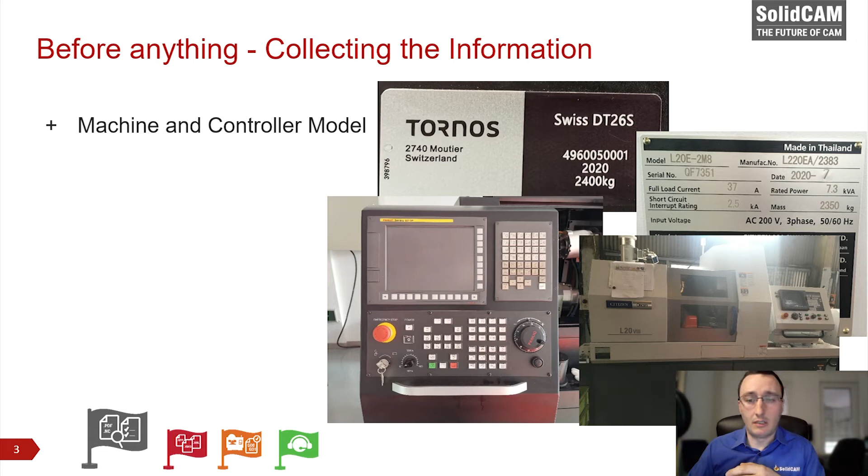At the very beginning, before doing anything, it is strictly important to collect all information related to your machine. The very first is about the machine and control model. I think this is very basic, where most machines look the same. Also in the Swiss type, you have basically the plate on the back side of the machine, sometimes also on the front side, showing you exactly the machine model. The controller model is also very crucial, so make sure these things are noted very well.

The second is the programming manual.

There are various programming manuals, the formats and their qualities. Some machine brands make them better, some make them, let's say not worse, but less quality. Let's say like this.

It doesn't matter if it's a PDF form, or maybe sometimes you need to make scans of the hard copy. It is important that you actually have a manual. Without the manual, you cannot basically understand the machine. The programming manual will help you understand how the machine actually understands the code that's in front of itself.

This was about the programming manual, and the third thing is for sure the G-code examples. It is extremely important that you receive the G-code example from the customer, that it's 100% running on the machine. I will suggest that you always have the most basic example and the most advanced one. I will also advise you to have a drawing together with the G-code example. This will help you understand the G-code and the operations and steps that the customer is taking in order to machine this part.

It will help you analyze the way the customer programs this part, but also from the other hand, it will help you understand what are the order of the M codes and G codes in order to run this machine well, especially in some specific cases of machining.

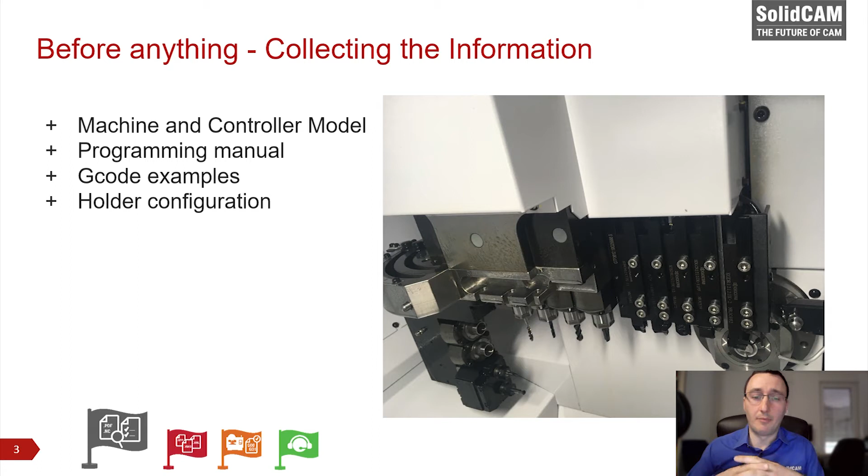If they do, make sure that you also grab these configurations as well. Over here, I just have an example of the Citizen L20, looking on the front tool, back tool post, long drill. And also it's very important to check.

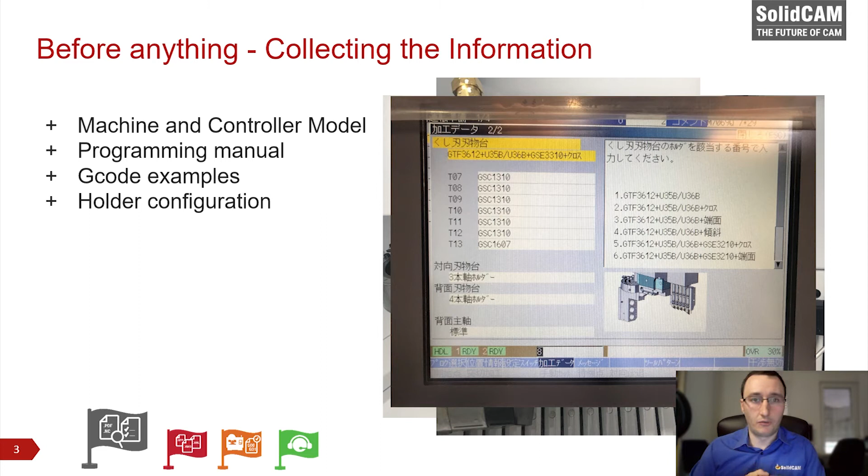On the controller, you have the machining data. Each machine brand is different, but basically the machine needs to understand what is the holder configuration that you're running now. In this page, you can see all these numbers. You don't need to actually understand them, but for sure when you go to the programming manual later on, it will be clear to you what is the holder configuration that your customer is currently running on this machine.

The fifth thing is the 3D models of the machine for customers who want to have the machine simulation. I would strictly recommend having this for all Swiss type machines. Some machine brands have them ready, some machine brands don't have them.

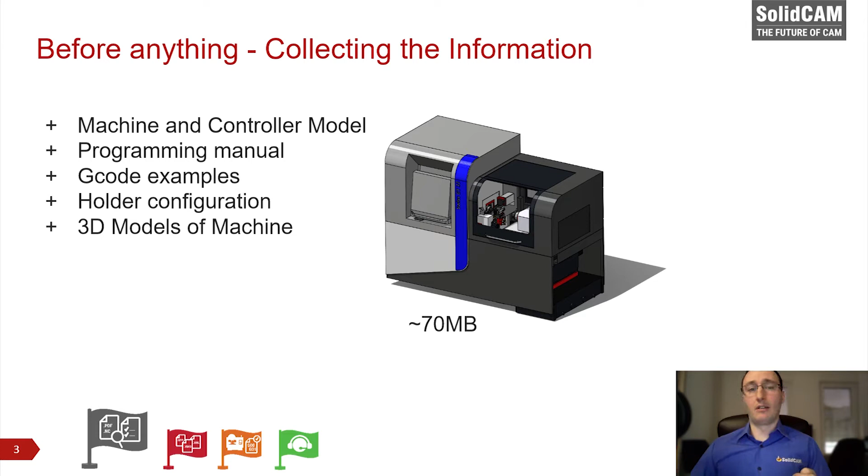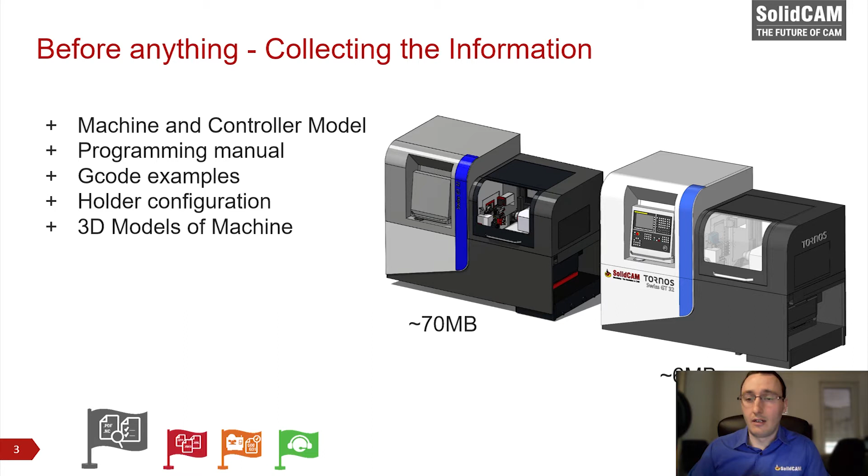From my experience, I figured out that these are pretty hard to get. And even if you get them, they're not well optimized. The export size is very big, which will definitely influence your simulation experience. There is some work in optimizing the 3D data later, so you get something that's much less in size, so you get the best programming, simulation, and verification experience.

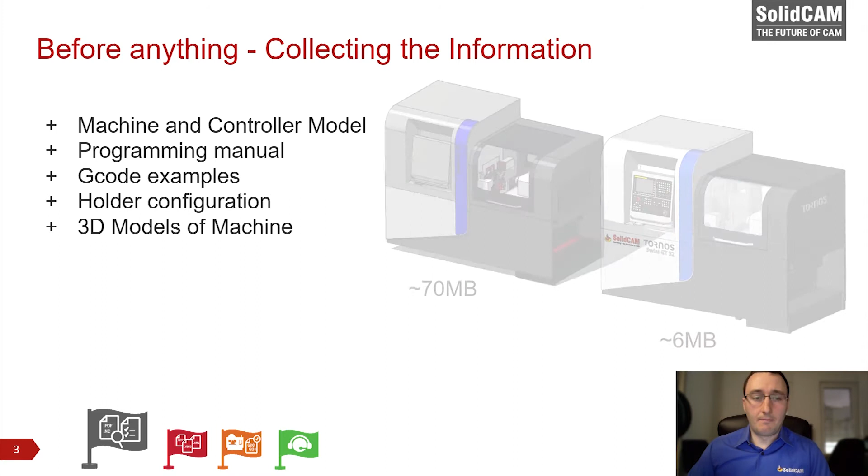Now, in the case when there are no 3D models, there are two cases. There are really no 3D models existing, maybe the machine is old. But there are also examples when in order to get the 3D model, it takes like 3-4 months to get it. Right now, you need to finish your project and you don't have the 3D data. So how can you do it?

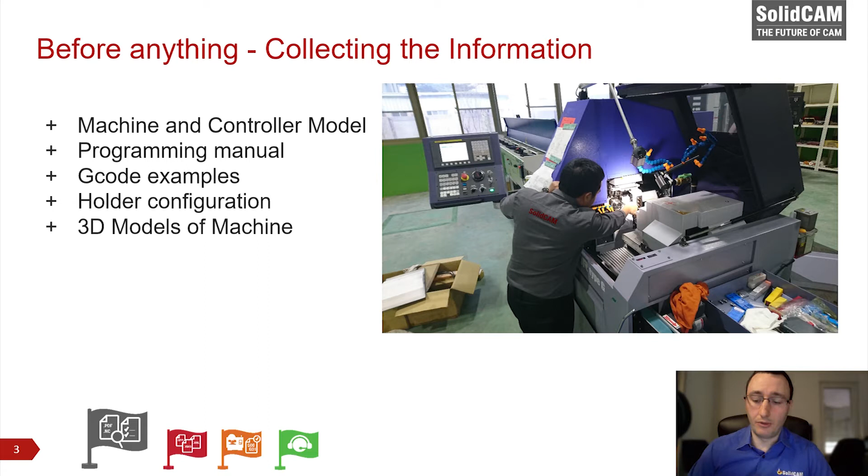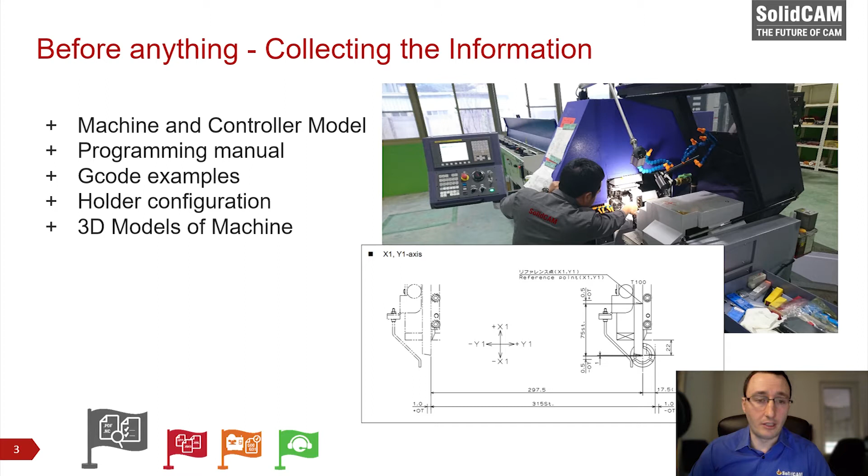Luckily, the programming manuals are good. There's a lot of drawings inside, and they are very accurate. From my experience, I get a very positive experience with this. So most of the 3D model of the machine, the main components, the movement parts of the machine, can be designed based on the drawings from the programming manual. There are some elements that may not be possible to do, but definitely you can do it on site. You can take some measurements if necessary for the verification and simulation.

This is the results of, for example, one of the machines that we have designed, which is fully optimized, very small in size, very fast simulation. So I definitely encourage everybody who doesn't have access to any 3D model data available, that yes, you can still do it up to this level. Of course, it's not necessary to do it up to this level, but at least to tell you that yes, this is actually possible.

All right, now the second stage. Once you have all of this information, let me also go back for a moment.

It is also extremely important, after getting all the information, that you validate your data. It happened many times to me that programming manuals were wrong, G-code examples were wrong maybe. This can be easily validated if you take a look at the G-code examples and compare it with the programming manual. So make sure you read everything before you actually start writing the post.

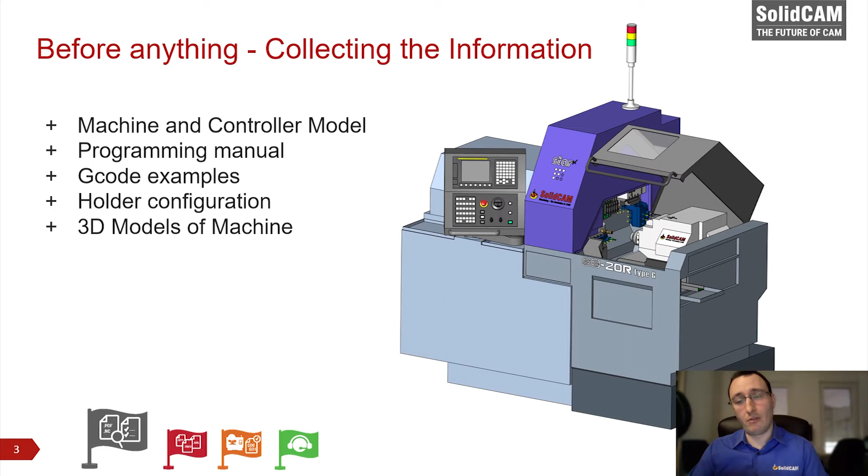So we make sure that we read all the things necessary. We check out the G-code examples, and then we go to the stage where we are actually writing the post processor. All right, now writing the post processor.

First, the very first stage is building the kinematic. SolidCAM understands the kinematic through the VMID file, which basically consists of the axes, linear and rotary, the turrets, the tables, submachines, and a lot of information relating to the controller itself and the working style for this machine. All this data is stored in the VMID file. I think this is the very first step.

Now the second step is writing the SolidCAM to NC translator in the internal language of SolidCAM, which is called GPPL, and the extension for this file is GPP. I would say this is the most intense step of writing any post processor, not only for the Swiss type for sure.

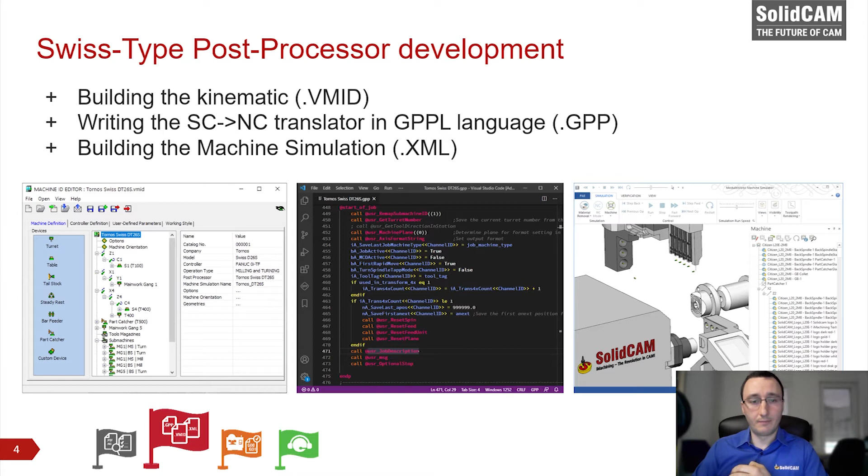Okay, there are many things that are not in the documentation, therefore it's very important to test it on site. Now, before going on site, there are also some things that you need to do. First of all, make a programming of your particular CAM part, make the visual check of your machine simulation, and do a visual proof out of your G-code. These things are very important.

You need to make sure you program at least two CAM parts. The first CAM part is the part that you think is most convenient for this kinematic, for this controller, for this customer. There are tons of rules that we have internally about what this CAM part should have, what kind of geometries. But basically there is only one rule: make the shortest toolpath that will actually give you the best output results.

Okay, so to validate the post-processor output, visually check it in machine simulation, and then also prove out your G-code visually through some multi-channel application where you will see if all the codes are okay, if all the G-codes are in the right spot, and also compare it with the customer one, and so on.

Now, there is one thing about what I said about the CAM part. The first part is definitely the one you choose, and the second—also very important—is the customer part. Usually customers always give this task, like 'please provide me a G-code for this part.' Usually this part is not the very first step that you need to do. The first step is always to test your part, validate your part, and of course it is important—no excuses—that you will also do the customer part.

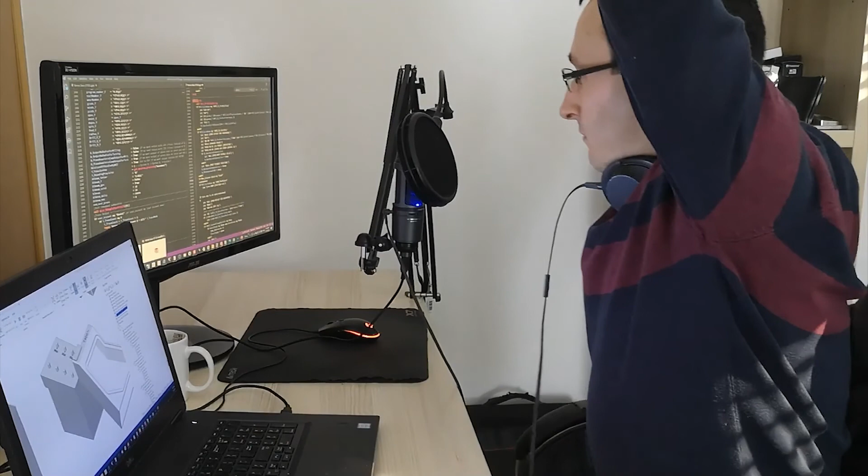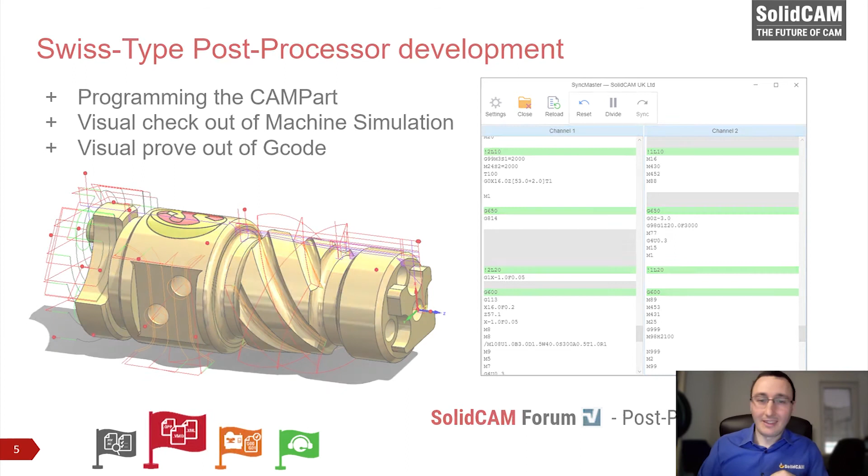Once the post-processor is ready, we go to the customer to validate the output on the machine. But the very first step is to schedule it on time. You need to understand customers usually run this machine 24/7, so it's very important to schedule beforehand and communicate with your operator about specific things on the machine: available stock size, available stock material, holder configuration, and tool availability. These are extremely important to have ready before you go to the customer.

Make sure these are ready because they can save you tons of time on setup. Swiss-type machines are not so easy to set up. Keep in mind these machines run 24/7, so try not to use stock sizes or tools that aren't available on the customer side. Customers like when you use the setup closest to what they have, because after post-processor validation, they can continue running their parts.

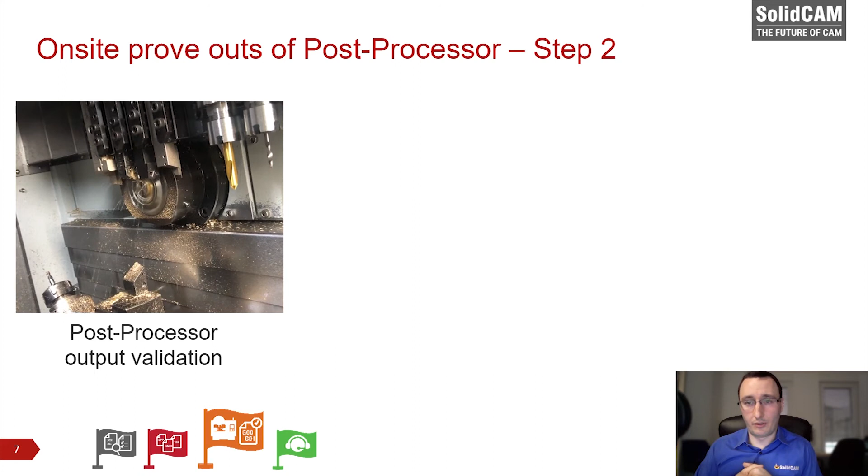Now we are at the customer, validating our post-processor on the machine. We come right on site, deliver the G-code, everything is ready, and we make the post-processor validation. There are tons of things you need to check: arcs, planes, compensations, plane rotations, part transfer, axis patterns, superimposition, and more.

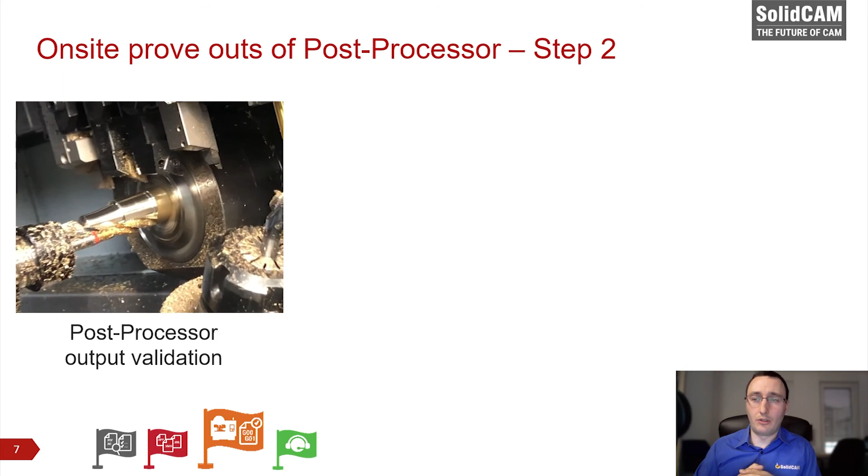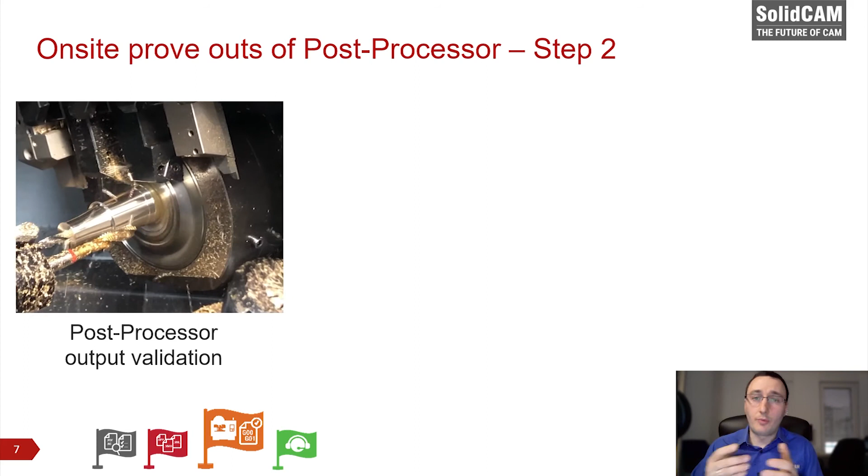Once on site, from my experience, it never happens that the very first code runs from beginning to end. That's why it's extremely important that you're on the customer side, there at least for one day, maybe two, depending on the first test. After the first test, it could be that we're too far away, so please continue working with your posts, or it could be that we can adjust it on site.

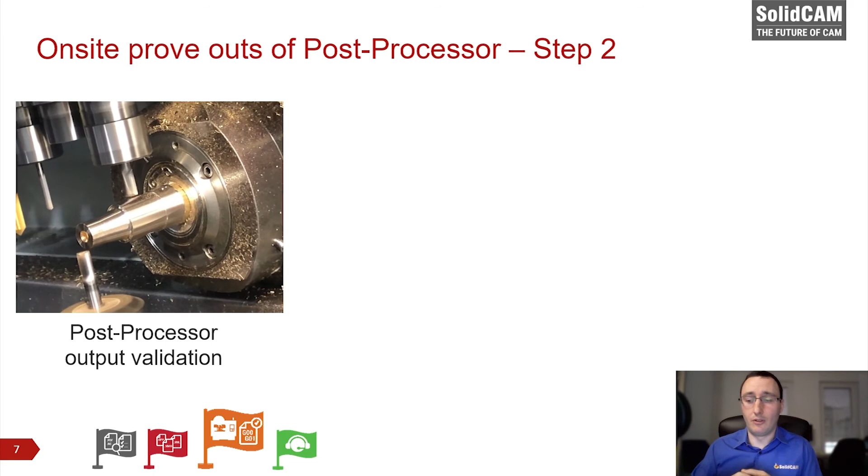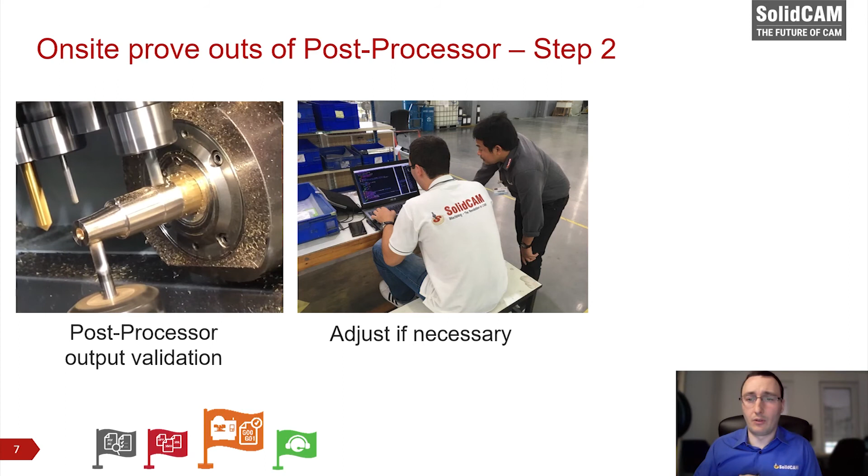Make sure you have experts next to you, either online or on site, so you can adjust the post. It's best if you can adjust it on site - it's very important because it gives confidence to the customer, that these guys can change the post on site, so if I call them, they can always modify according to my needs. This is extremely important.

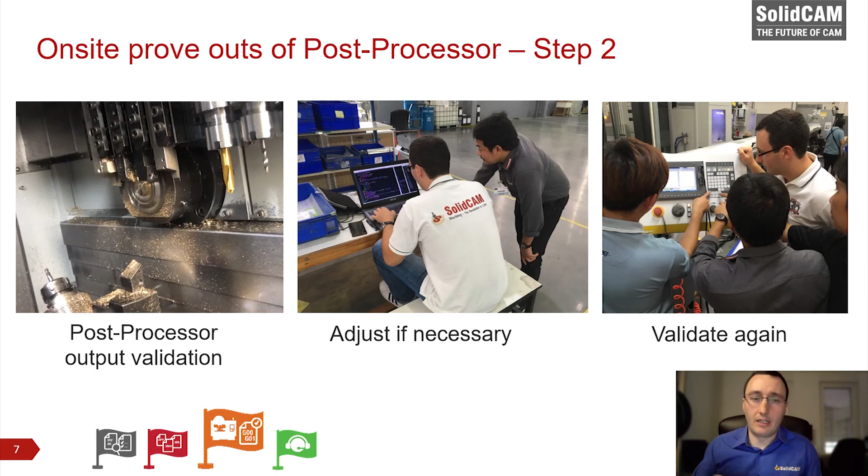And third, after adjusting, validate it again, and make sure the G-code runs from beginning to end without any manual modifications. The result, of course, is that you have at least two parts: one tested by yourself and one by the customer. What's important to say in this case, keep in mind that...

...these parts, once you machine them, store the data on the cloud. If necessary, you can always use this data for various things, like validation - once you modify the post, you can easily check these parts to see if they still work with your post-processor modification. So keep that in mind for sure.

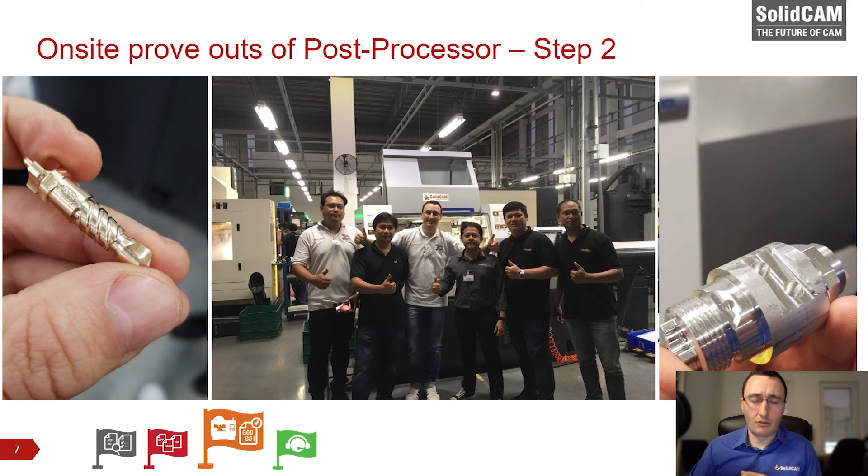Okay, so the L series is very important, M series is very important. So for all of these, we do have documentation ready for our customers. So make sure you build also your documentation. It will help you and your customer. It's like a win-win situation for sure. It's time invested that really pays off.

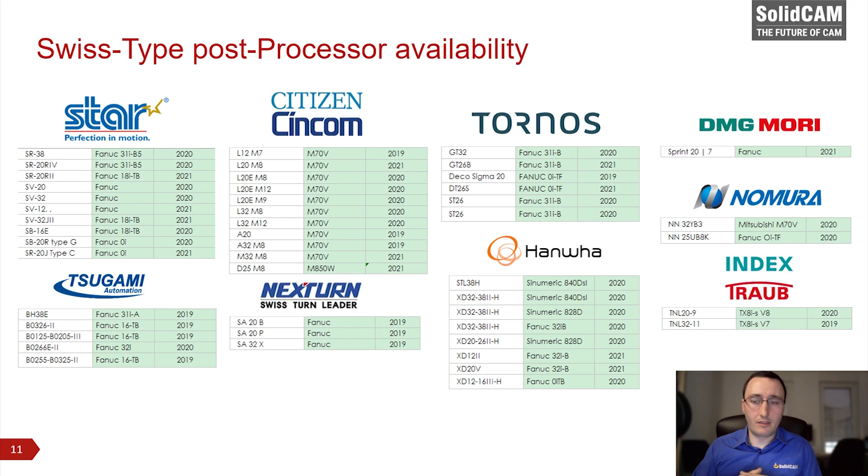Now, for the last, I would like to say a few words about Swiss type post-processor availability. As you have probably seen in this presentation before, this slide, I would say, shows all the topmost machine brands on the market. And we will be transparent about the availability. So far, we have built more than 50 Swiss type machine posts worldwide. I'm just mentioning here all the post-processors built by SolidCAM Ltd. Of course, there are also a lot of posts developed by our resellers. Thank you for doing that.

So for the end, I would like to say thank you for looking at this. I hope it was very informative. I hope you have a better picture of how we are developing the post-processors in SolidCAM. And there are a lot of post-processors developed from this office over here.